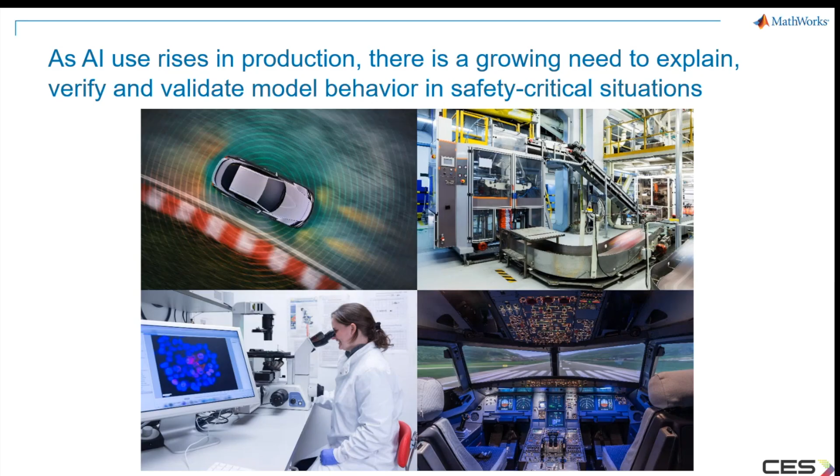Let's take a look at some of the key market trends in the aerospace industry, particularly around certified systems, software, and hardware. First, we will consider civil aerospace. In civil aerospace, we are seeing rapid innovation; new applications like urban air mobility and UAV certifications are becoming major areas of focus. And there is also strong momentum around sustainability, with technologies like green aviation gaining traction. More recently, the importance of cybersecurity and even AI certification has grown significantly as these systems become more intelligent and connected.

In the space sector, a lot of private companies are now voluntarily following standards like DO-178C to ensure high quality even when they are not formally required to do so. This shift reflects increasing pressure to meet the expectations of space agencies like NASA or ESA, the European Space Agency. New entrants are also aggressively pursuing certified projects, intensifying the competitive landscape.

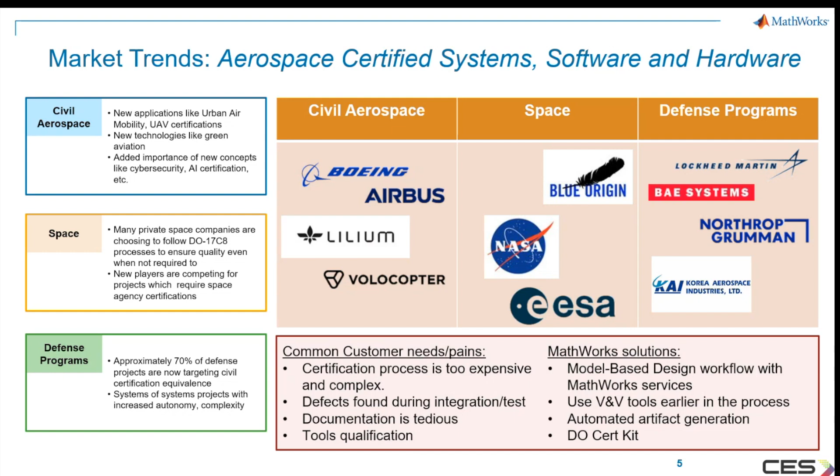Next is AI-driven system design with MATLAB and Simulink. Let's get into the specifics of AI-driven system design. It involves four main stages: data preparation, algorithms and modeling, simulation and test, and finally deployment into the field. It's important to note that this workflow is not linear. In many cases, it is iterative, especially when testing uncovers improvements that need to be made.

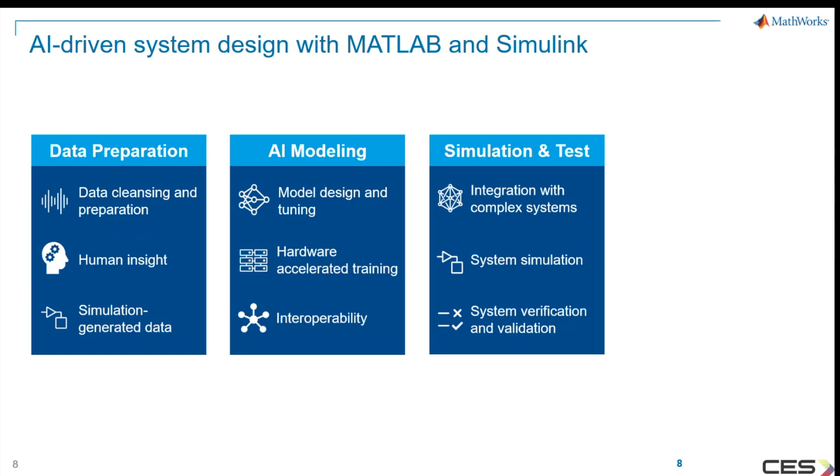Drilling down into each of these sections reveals mini workflows that need to be performed, and each of these has its own challenges. The first step in this workflow is data preparation. The data can come from multiple sensors or databases. Sometimes it is structured or unstructured. Sometimes it spans time, but with different time intervals. It can be noisy. It represents different domains and so forth.

One goal of data preparation is assessing these various sources of data. Not all data is critical, and some has more predictive value than others. And some events are extremely rare and may not be included in a given data set, but you still need to consider them for modeling. So engineers with domain expertise are best suited to determine the answers to these kinds of questions.

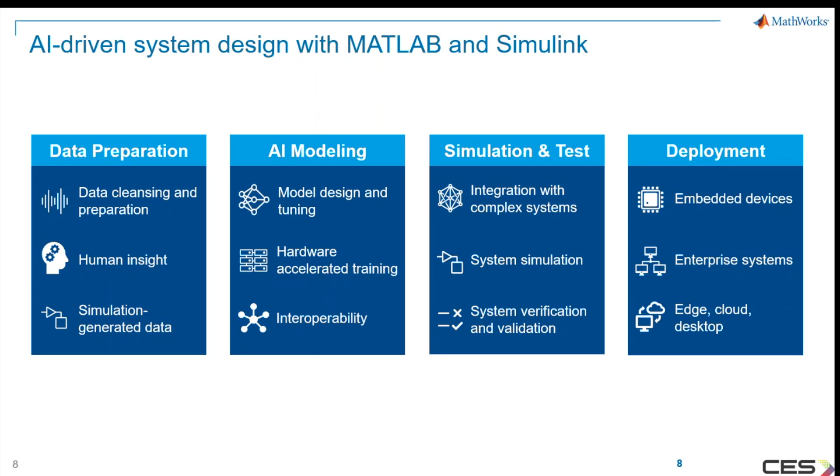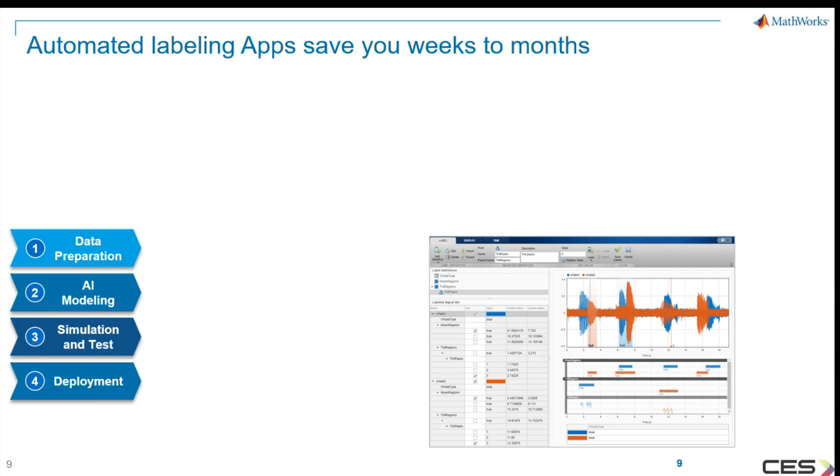And with our signal labeling app, a similar process can be applied to a wide range of signal data. In this example, we are labeling whale sounds. Both these apps also provide ways to automate the labeling process and save many hours of time. Next, we provide a facility for creating synthetic data. This can be vitally important when you are trying to build an AI algorithm that successfully handles extremely rare events.

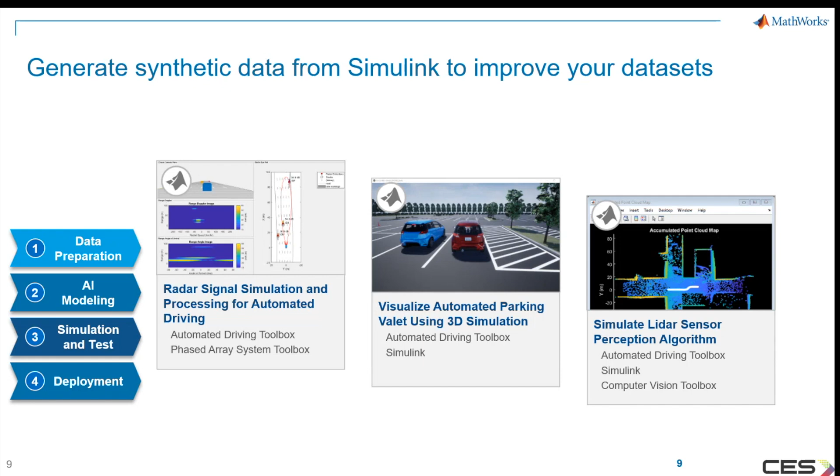Let's move on to the second step in the workflow, which may get the most attention: AI-based algorithms and models. Of course, it's important to have direct access to many algorithms used for classification and prediction, from regression to deep networks to clustering. And there are a variety of pre-built models developed by the broader community that you want to use, often as a starting point or for comparison purposes.

While the algorithms and pre-built models are a good start, it's not enough. Examples are the way engineers learn how to use algorithms and find the best approach for their specific problem, particularly reference examples. So at MathWorks, we provide reference examples built for specific engineering applications. We provide hundreds of examples for building AI models in a wide range of domains.

Is that the end? No. We also provide apps for modeling. For deep learning in particular, we ship pre-built apps that can help you automate the training step and provide visualization for understanding and editing deep neural networks.

And there is another app called Classification Learner. These kinds of apps and the Regression Learner automate those steps as well. And then comes the Experiment Manager app. It enables you to create deep learning experiments to train networks under various initial conditions and compare the results.

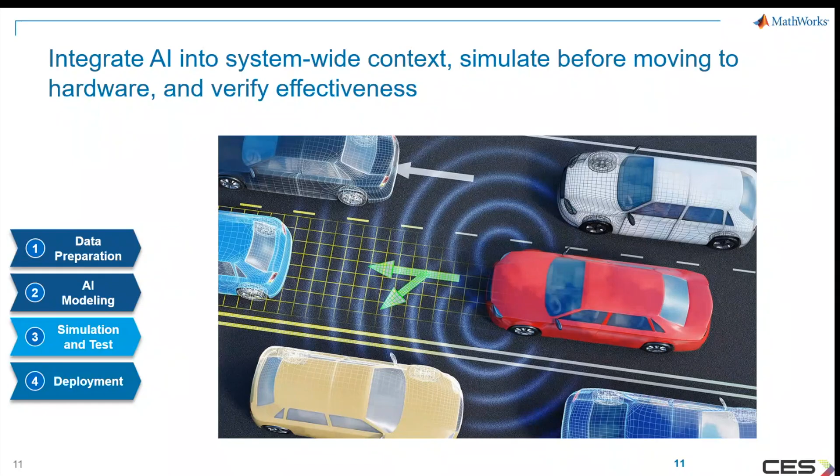And this is how it all works. Here is a small video. Engineers can combine the sensor fusion, control logic, vehicle dynamics, and visualization components with their AI models for simulating the scenarios in which they will operate. Here, this example shows how a vehicle and lane detector works in a self-driving car.

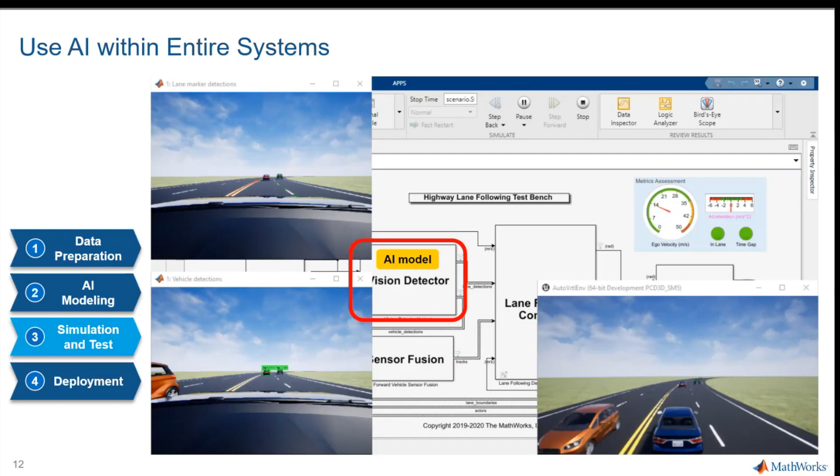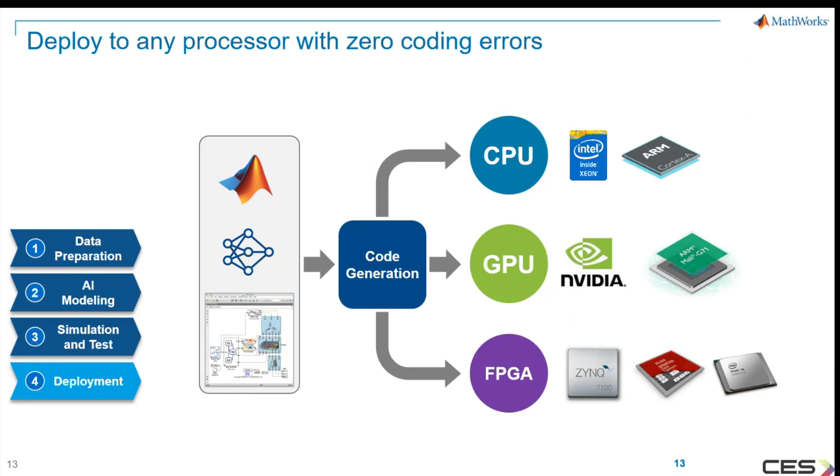Next is about the deployment. We have a unique code generation framework that allows models to be developed in MATLAB and Simulink, and you can deploy it anywhere without having to rewrite the original model. Automatic code generation eliminates coding errors and is an enormous value driver for any organization adopting this. The power and flexibility of our code generation and deployment framework is unmatched.

So deploying an AI model is not the end of our system design workflow. Organizations are also understanding that deploying models into systems is not an end state and they must be maintained continuously once they are in operation. In recent times, model DevOps or model ops is a process that organizations are adopting to manage the life cycle of models. In essence, model DevOps is a combination of software development, IT, and model development practices. Here is a familiar representation of model DevOps. Across all the stages, it's not one, but a combination of different software pieces running on the edge or in the cloud, coming together to build a complete solution.

So I have spoken about how MATLAB and Simulink are used in the design and deployment of AI models. But for model DevOps, MATLAB and Simulink integrate with all major platforms that are used across each of these stages. MATLAB plus Model DevOps enables cross-team collaboration to align the goals of engineering, computer science, data science, and IT for model lifecycle management.

And why MATLAB and Simulink for artificial intelligence? There are numerous benefits to building AI-driven products and services with MATLAB and Simulink. Your engineers can leverage their expertise without becoming programmers. Using domain-specific tools, they can design powerful algorithms that incorporate years of experience and can handle rare events. They can use modeling and simulation to tackle integration challenges and reduce risk. And the end result can be deployed and managed wherever it needs to be without recoding.

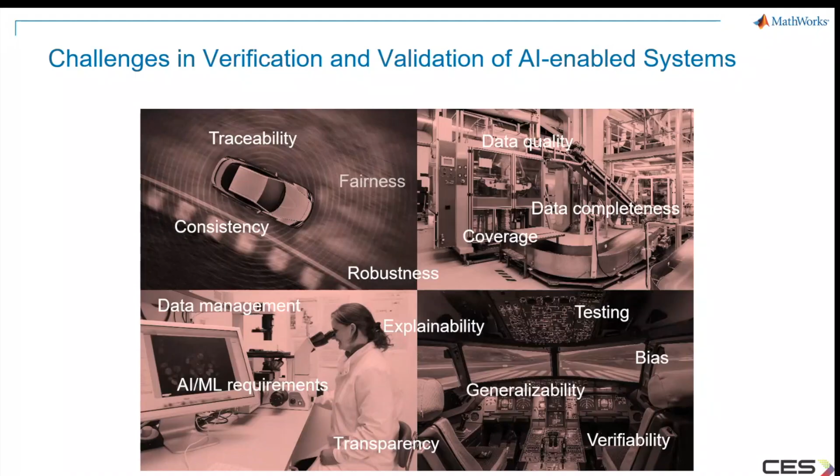Next is the challenges in verification and validation of AI-enabled systems. So here are some of the challenges. If I have to name a few, it includes data management, traceability, robustness, requirements, and much more. It's just a representative sample of some of the challenges that may arise from having AI components in our system. If we consider some examples, first, AI systems, especially deep learning models, can behave differently due to the randomness in training, floating point precision, and sensitivity to small input changes. This unpredictability makes it hard to verify the behavior under all conditions.

Another challenge is the lack of explainability, or the black box nature. Many AI models, for example neural networks, act like a black box. We don't fully understand how they make decisions. This makes it difficult to trace why a certain output was produced, which is critical for debugging, certification, and safety audits. Another challenge is data dependency. AI system performance depends heavily on the quality, diversity, and representativeness of the training data. Verifying that the data covers all relevant cases, especially the corner cases, is difficult. Bias or gaps in the data can lead to unsafe or unfair decisions.

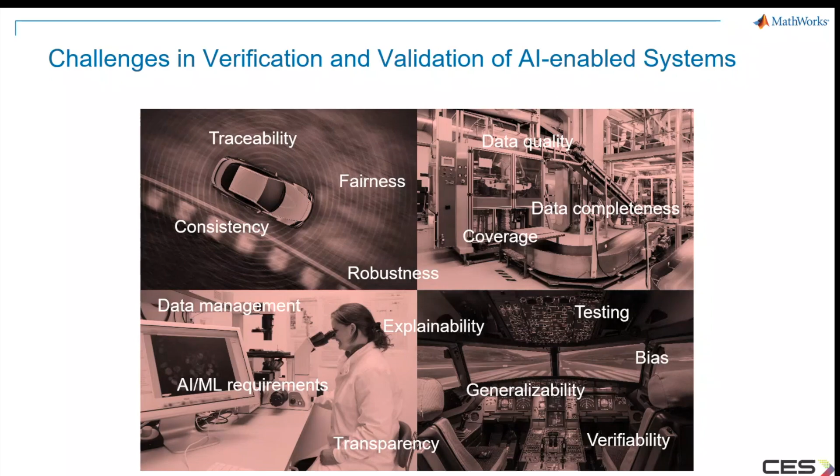Now let's see how we can address some of these challenges. The deep experience in safety critical certification enables us to drive new standards for AI. We know that some of you may be working in regulated industries that have these kinds of standards, and you may use our certification kits to ensure that the systems you make meet appropriate standards. These standards govern safety critical systems for airborne software, road vehicles, and sometimes the healthcare industry. The problem is that some of the verification methods they prescribe can't be performed or don't necessarily make sense for machine learning or AI related systems.

So this IEC certification kit, ISO 26262, it's mainly for the automotive, and DO-178C and DO-254 is applicable for aerospace related. And we are happy to inform that MathWorks is participating in the standards committees with EUROCAE and SAE to define new certification standards that are appropriate for artificial intelligence.

We know how important our current safety critical certification solutions are for our customers, and we are working to build new standards needed for artificial intelligence and then to provide you with the tools needed to certify your systems that include AI.

In healthcare industry also there is a similar standards preparation happening. FDA has released its first AI or ML based software as a medical device action plan, which outlines the regulatory framework for AI enabled medical devices.

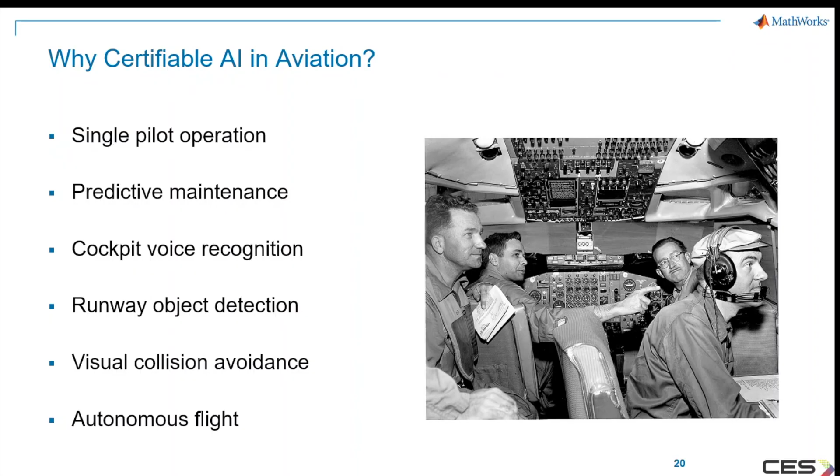The aircraft standard related to software design is given by DO-178C. Now, let's see what is DO-178C. It's a standard for software considerations in airborne systems and equipment certification. This software standard outlines the software engineering processes, activities, and tasks necessary to ensure that airborne software is reliable, safe, and it can perform its intended functions.

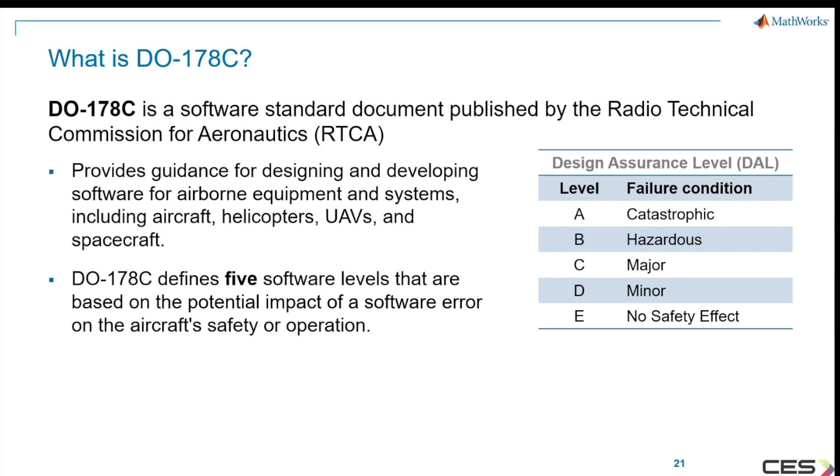It defines five software levels that are based on the potential impact of software error on the aircraft's safety or operation. These are referred to as design assurance levels, or DALs. So compliance to DO-178C is mandatory for software used in civil aviation applications in many countries. The latest version, DO-178C, was released in December 2011, and it includes updates to the previous revision, DO-178B, to reflect the advancements in the software technology and development process.

But it turns out that several DO-178C objectives cannot be directly applied to the software with the machine learning component, and this creates a problem. How are we then going to use machine learning in aviation software and certify it against DO-178C? How can we build trust in new verification methods for machine learning? The potential is huge, but the gaps and shortcomings need to be addressed.

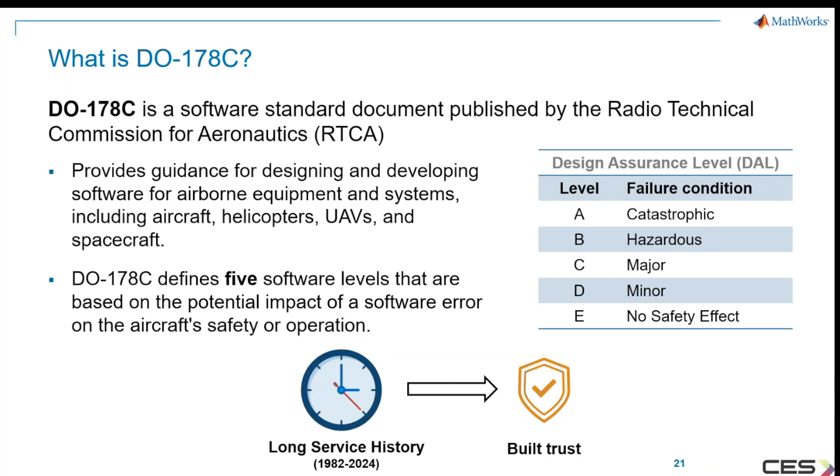For that matter, industry and regulators are working tirelessly and making significant progress for machine learning certification in aerospace. EASA, the European Union Aviation Safety Agency, has published two iterations of their AI roadmap and worked together with various companies to produce seminal work for design assurance of neural networks and the use of formal methods for learning assurance. FAA, although it hasn't published as much collateral, also stays at the forefront of these developments.

Another significant entity in AI certification for aerospace is the EUROCAE WG-114 / SAE G-34 Joint International Committee. It is expected to release the new process standard soon, which will set the standard for development and certification or approval of aeronautical safety related products implementing AI. And the standard is named ARP6983.

They have already published in April 2021 an aerospace information report, Artificial Intelligence in Aeronautical Systems. And MathWorks is playing an active role in this group also. Now let's see how big is the gap between machine learning and traditional software development.

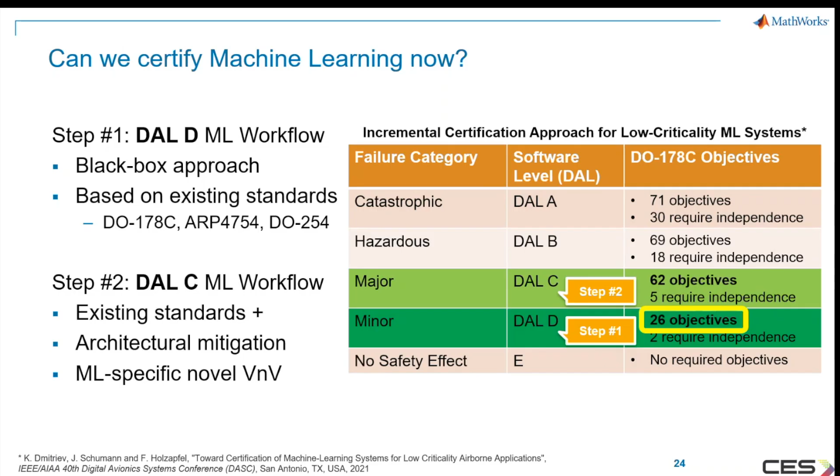For DAL-D, we can treat the software component as a black box. In that black box we might have the traditional non-machine learning source code, commercial off-the-shelf software object code, machine learning models, and machine learning source code all put together into an integrated object code. We don't need to know any of this from the outside. For DAL-D, we can just look at this as a black box.

We have our high level software requirements from which we have derived the software architecture, and within this software architecture some component is this black box. We will also develop tests from our high level requirements to test this black box. In summary, the origin of the source and object code does not matter, and so the black box verification according to DO-178C will satisfy all the objectives for DAL-D certification.

So the black box verification techniques are things like testing model accuracy, for example, something we are already used to as AI practitioners. This is just an excerpt of the compliance analysis that you have to do according to DO-178C. We can see here the objectives for DO-178C compliance analysis, and for DAL-D we can actually omit objectives 4 and 5. Those say low level requirements are developed, and derived low level requirements are defined and provided to the system processes, including the safety assessment. So these are not applicable for DAL-D.

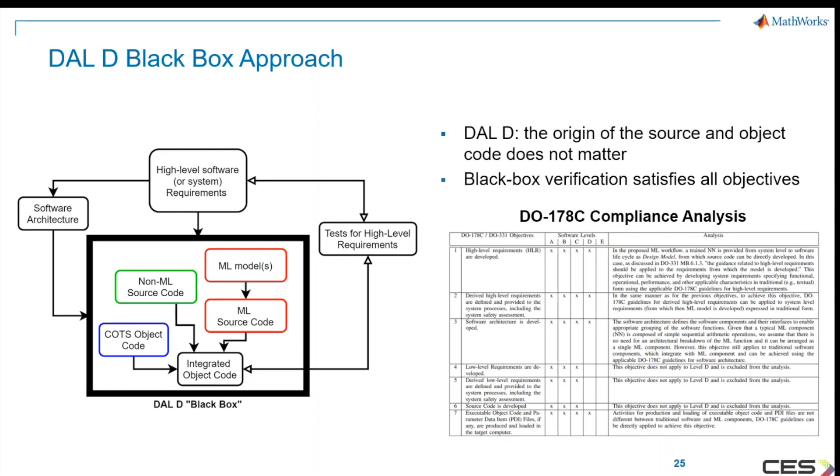And we will be following a workflow called the W-shaped development workflow for developing DAL-D components. The W-shaped development process is a framework by EASA to adapt the classical V-shaped cycle to AI applications, and I will be adopting this workflow throughout the presentation to explain how you can make your AI-enabled system suitable for DAL-D certification.

Note that this W-shaped development process is concurrent and it can coexist with the V-shaped cycle we typically see for non-machine learning components. So for example, from the system or subsystem requirements, we will derive or allocate requirements to the AI component and follow the W-shaped diagram. Or if it's a non-ML item, we can follow the traditional V cycle.

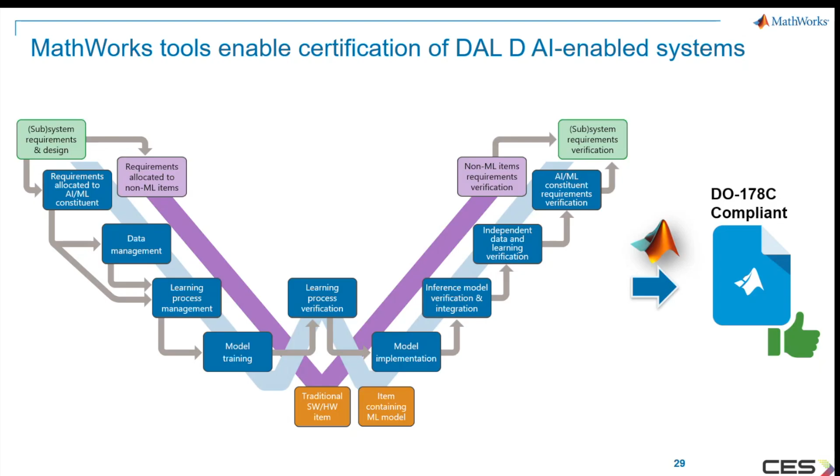Let's take a deeper look into the case study. So as mentioned, it's about a runway sign classifier. Before I explain further about this particular project, let's understand what a runway sign classifier is and what different variants are available. The runway sign classifier is a system intended for detection and classification of airport signs. The system receives visual images from a forward-facing camera installed on the aircraft, and it uses a deep neural network for detection and classification tasks.

There are different variants of such a system depending on the level of automation and corresponding criticality levels. The first variant is RSC FB. RSC stands for runway sign classifier, and FB represents flight bag. This variant serves as a pilot assistance system by providing information about the detected runway signs to pilots, for example, via an enhanced vision system. Failures of such a system will have minor safety effects, as the pilot is still responsible for the continuous perception of the visual environment and retains full control of the aircraft. Consequently, RSC FB can be assigned the lowest design assurance level, DAL D.

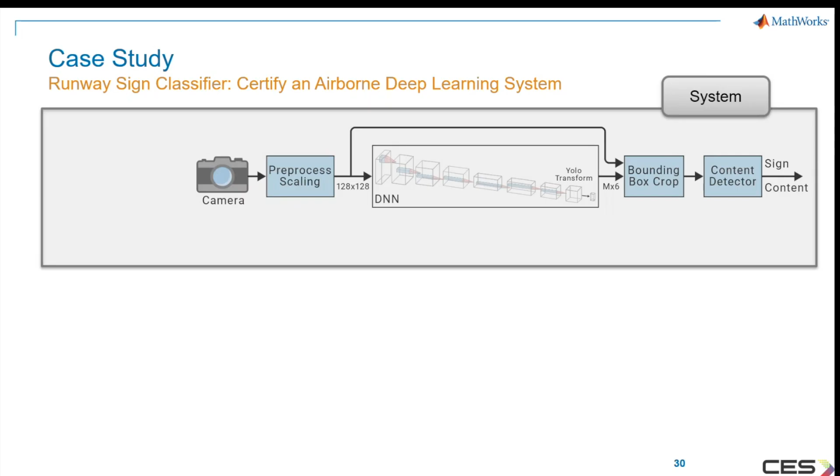As shown in the image, this system consists of a front-mounted camera on an aircraft. The camera relays images, we do some pre-processing and rescaling, and then we pass them to a deep neural network. In this example, we are using YOLO networks, whose role is to locate and classify airport signs on the runway. These signs will be either informational signs, which appear with a yellow background, or mandatory signs, which come with the red color. The bounding boxes and classification labels are identified and then passed to the pilot for information and the decision-making process. So the whole system is of low criticality, DAL D; it's just providing information to the pilot and not taking control of the aircraft in any way.

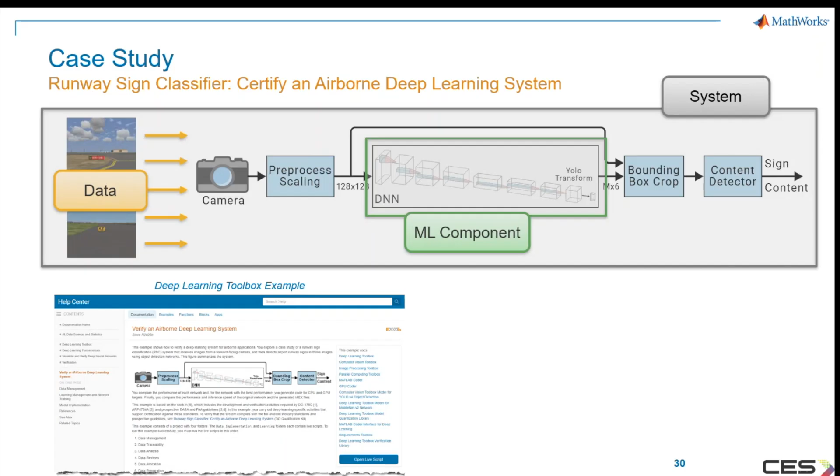Okay. Note that this case study is comprised of a few elements: the complete system, including everything from camera to the HUD, the ML component, which is a deep neural network, and the data.

For the data set, we will be using instances of different airport runways in various locations and operating conditions such as snow, weather, or daytime or nighttime, with the goal to adequately represent the operational design domain. The images for the data set have been created synthetically using Simulink Aerospace Blockset and FlightGear.

To support the discussion for this case study, we will make reference to the system, the component, and data in the following slides. As you can see on the slides, the example that I'm showing today is included as a part of Deep Learning Toolbox and DO Qualification Kit products from MathWorks. The Deep Learning Toolbox example is a lighter version of the end-to-end workflow example, whereas the DO Qualification Kit example addresses specific activities that support the certification against DO-178C. You can access these examples if you have the Deep Learning or the DO Qualification Kit toolboxes.

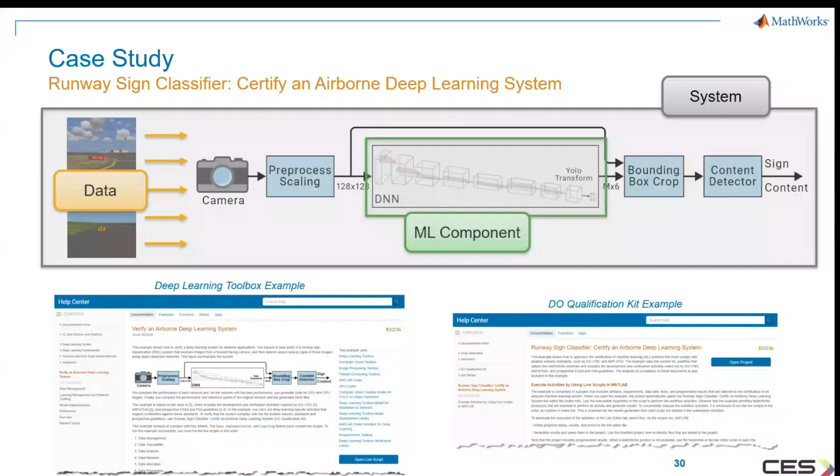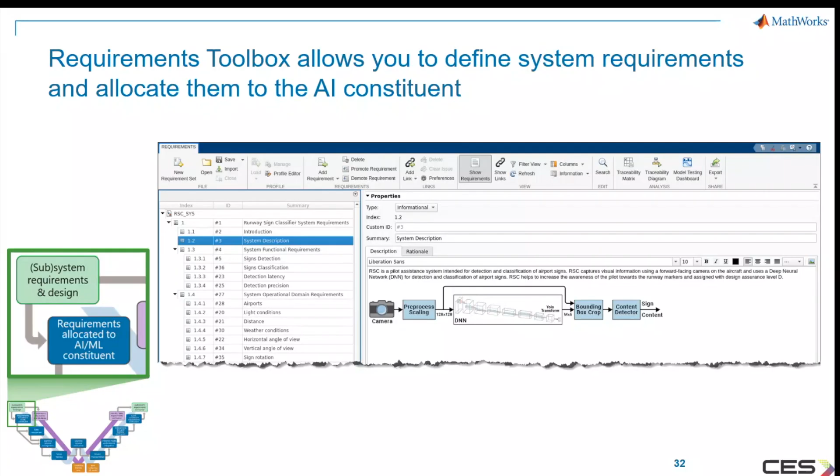So for the example I just introduced, I would like to take you through all the steps in this workflow, starting with the top left, the requirements allocated to the AI component. We have written a set of requirements in Requirements Toolbox for this problem. Requirements Toolbox allows you to define system requirements and then allocate them to the AI constituent. We can see here we have a system functional requirement and system operational requirement. These are the system requirements that are derived in the system process ARP 4754A, and we will need to allocate these to the component or to the system.

So we have functional requirements: what does my system have to do? And we also have the operational requirements: in which context my system has to perform. So here we have written a set of system requirements that we anticipate you would require for such a system. You can see the details here.

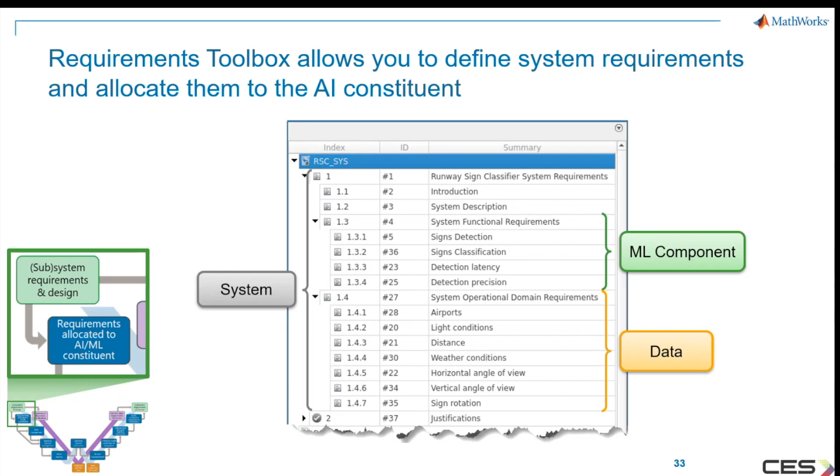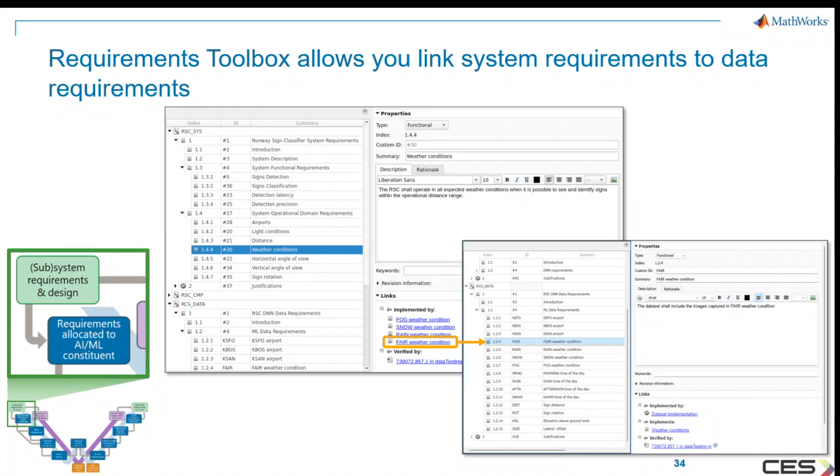Then by using the Requirements Editor, we take our system requirements, for example, the weather condition requirement, and we can link this directly to our data requirements. So here we have our four weather conditions: fog, snow, rain, fair, and we can link these requirements to four separate requirements on the data.

In order to really tie these requirements to the data images themselves, we have created a data trace table. This table is automatically generated from a MATLAB script. It puts together all the data requirement IDs with the corresponding synthetically generated data. When generating the synthetic data, there is metadata upon construction with the requirements that are met for each of the generated images. So for example, let's say I create an image in San Francisco airport with fair weather condition, and those data requirement IDs will be

tagged in this metadata. Then for each requirement ID, we search through the corpus of images we have generated, put in all those images that have the corresponding data requirement ID, and then create a reference to those images through the MATLAB image datastore object. So taking a fair weather condition example, we have 114 images corresponding to fair weather condition, and they are all held by reference in this image datastore.

This shows how we can link system requirements to data requirements all the way down to the data itself. To go to the data level, we can simply click on the Open Data Store hyperlink, and it opens the Image Labeler app. So this is the means by which we can now review the correctness of the data. We want here to check that the images we have generated are correct, or in more general terms, that the images associated with the specific data requirement ID are the right ones.

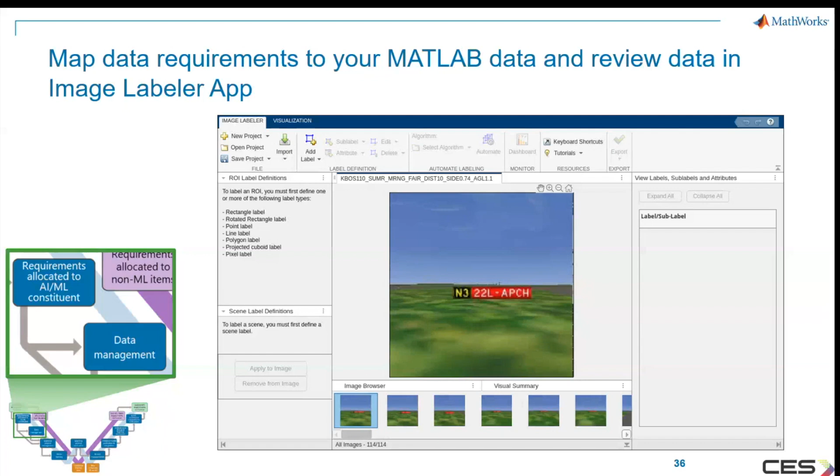Coming back to the use of the Image Labeler app, you can use it to correct issues with the bounding boxes or the labels, such as resizing or moving the bounding boxes, deleting the boxes, or changing the labels. When doing the synthetic data generation process, we got an incorrect bounding box position, which we can correct manually by simply dragging the bounding box as we review the data set.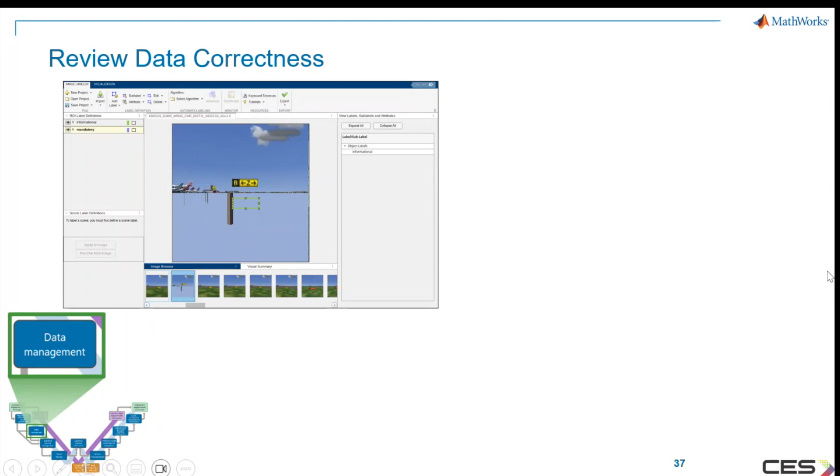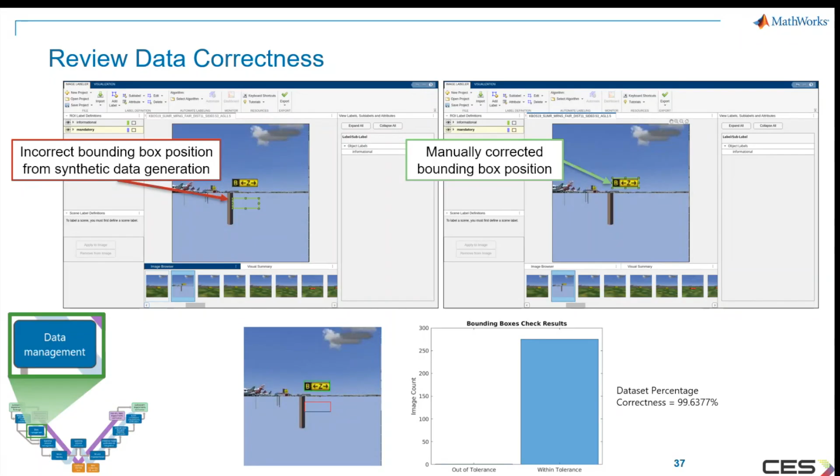And then we can also compare the reviewed data with the original data set and see how many boxes we have moved. We define the tolerance as a 5 pixel shift of the box.

And then comes the data augmentation. So this will improve the network accuracy by randomly transforming the original training data during the training. So here we have applied a color jitter augmentation in HSV space and random scaling by 50%.

Next up in the W-shaped diagram is manage, train, and verify the learning process. Moving on to the next step, here we want to build our network architecture, train it, and verify it. MathWorks has tools to interactively design your network, allowing you to be more productive. You can also interactively track the training and performance for different experiments, allowing you to select the network that best suits your metrics. And of course, you can accelerate the model training leveraging the GPUs and the cloud.

So at this point, we need to come up with an architecture to start from and analyze how different variations of the network may perform. Based on the requirement for the ML component, we decided to use the YOLO family for this example. These models require us to estimate anchor boxes as a part of the hyperparameters.

So what are anchor boxes? Anchor boxes are a set of predefined bounding boxes of a certain height and width, and these boxes are defined to capture the scale and aspect ratio of specific object classes you want to detect and are typically chosen based on the object sizes in your training datasets. Once we have estimated the anchor boxes, we train various YOLO networks with some standard hyperparameters.

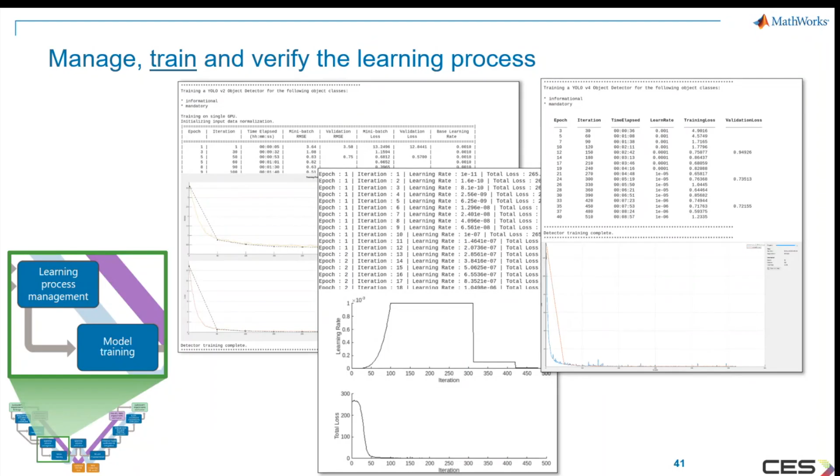And here is the learning process verification stage. And for the verification, given this is a DAL D component, we only require an overall accuracy on these models. So we define this as a part of the system requirements and then derived the ML component requirements that the model should have an average precision per class of at least 95%.

And as I have mentioned earlier, we have a unique code generation framework that allows the model to be developed in MATLAB and Simulink to be deployed anywhere without having to rewrite the original model. Automatic code generation eliminates coding errors and it's an enormous value driver for any organization adopting it.

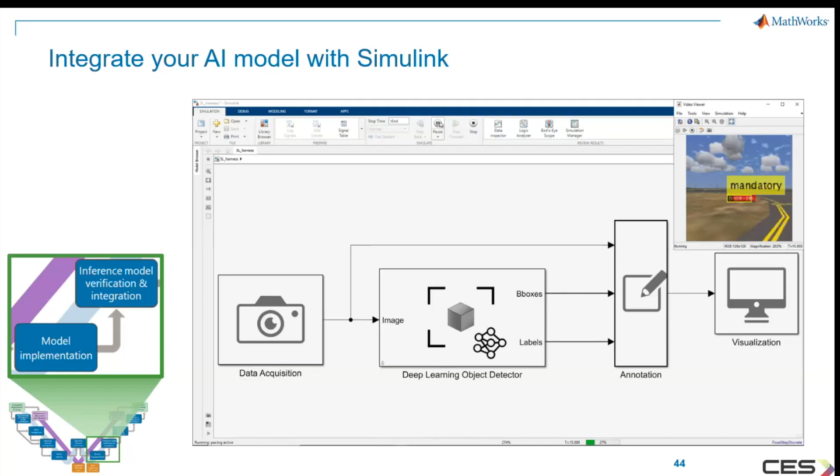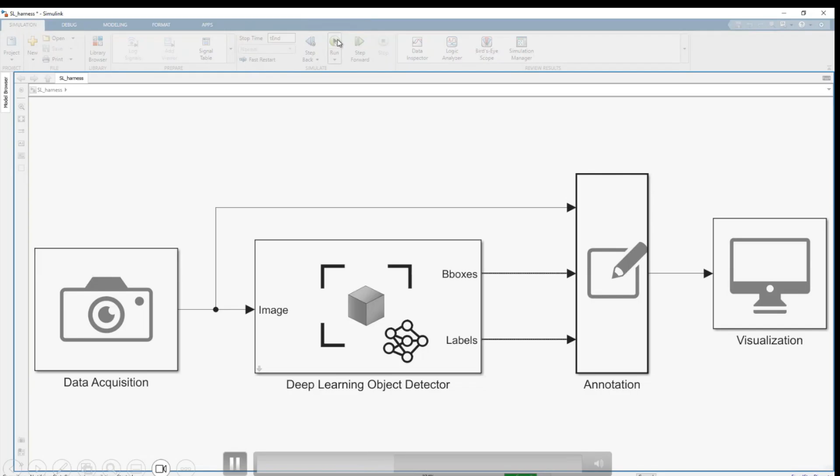And finally, here comes the integration of your AI model with Simulink. So basically in the center, you can see the deep learning object detector that we trained, and now we have a few different blocks. We have the data acquisition block and a visualization block that takes the role of the heads-up display. And then we are just passing a bunch of images through, running inference or simulating what the output of the network should be.

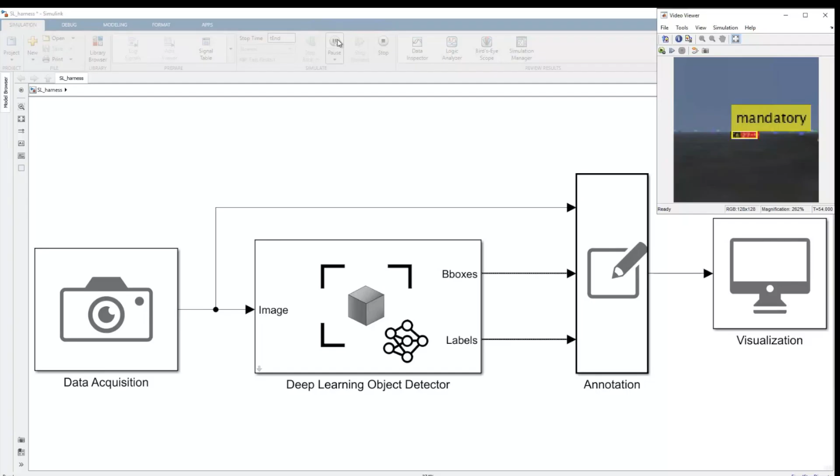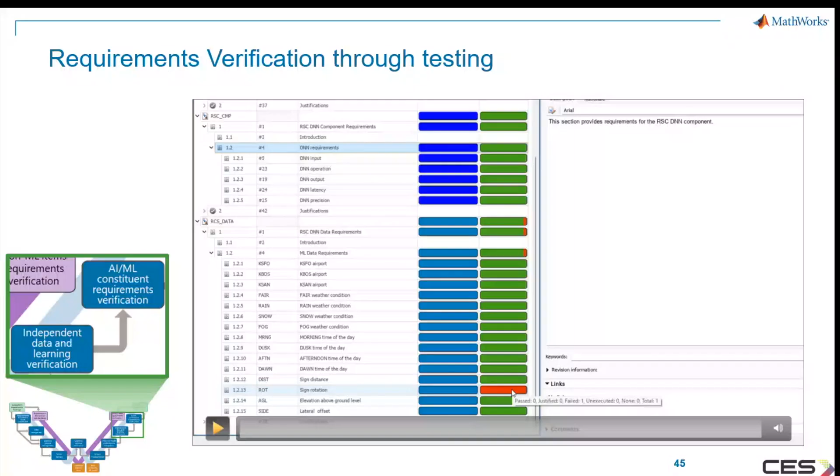Next, as we move to the final stages of the W diagram, I want to go through the process of requirements verification through testing. So recall, we had all our requirements and you can see it here. Now, for each of these requirements, we have written unit tests and now we want to run those unit tests. So we can just right click and run this test. And now by running the test, I can see if these requirements are met or if they are unfulfilled.

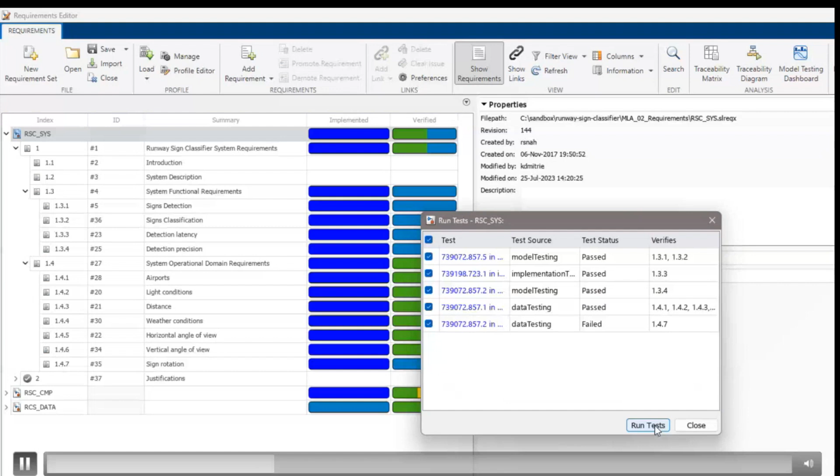After doing this, both at the system level and at the component level, I can see that there is an unmet requirement. And if you recall a few slides back, we didn't have any rotation sign images. So this unfulfilled requirement is representing that failed test.

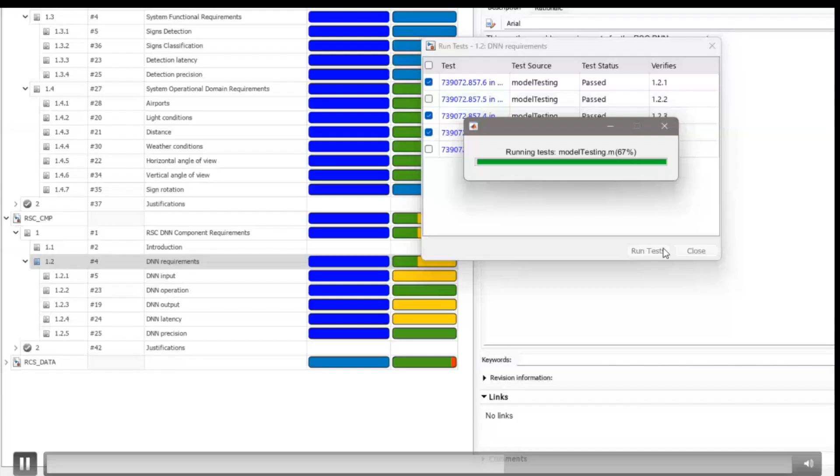But now, for a DAL C system, it's not enough to simply treat the object detector as a black box. We need to gain a better understanding of what is going on inside the object detector, and this includes placing requirements on the machine learning model itself and gaining understanding of the emerging properties of the neural network. So standards will not be ready until 2025, but we can hypothesize some techniques that may become relevant to verify and run machine learning models. We'll see how we can do it.

So can we tackle DAL C today? We are still waiting for the standards to be released. But what can we do today? It turns out that we can also address DAL C today, and I will quickly explain how. This is possible through the use of an architectural mitigation strategy, through the use of dissimilar DAL D

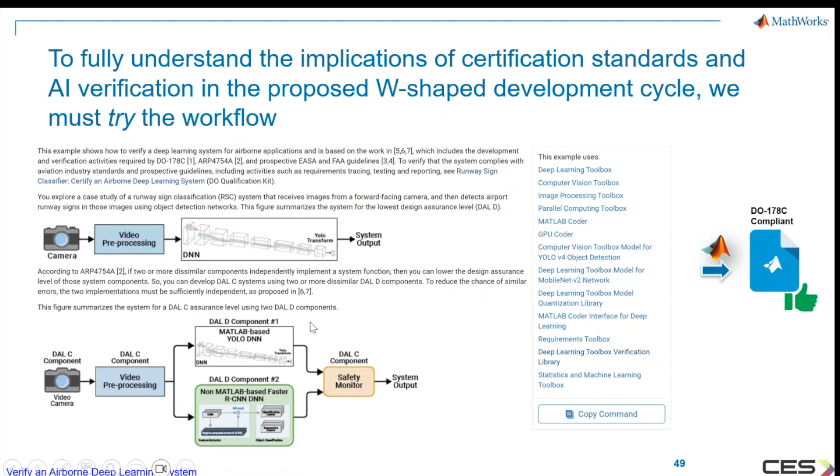So here is the demo. Here is an example. Of course, moving to DAL C requires going back to the requirements and making modifications to some of the requirements, adding new ones, and so on. Earlier, for the DAL D case study, we included Deep Learning Toolbox and DO Qualification Kit as part of the reference workflow example.

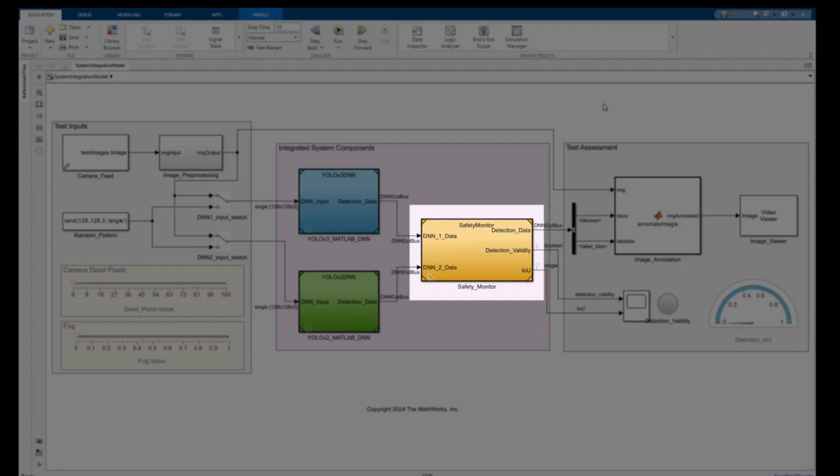In this case, the test harness. Let me just run the video. So in this case, the test harness simulates through the sample of test images, performing some pre-processing, and it can be a DAL C component. And then it predicts the bounding boxes from both MATLAB YOLO v3 and YOLO v2 detectors.

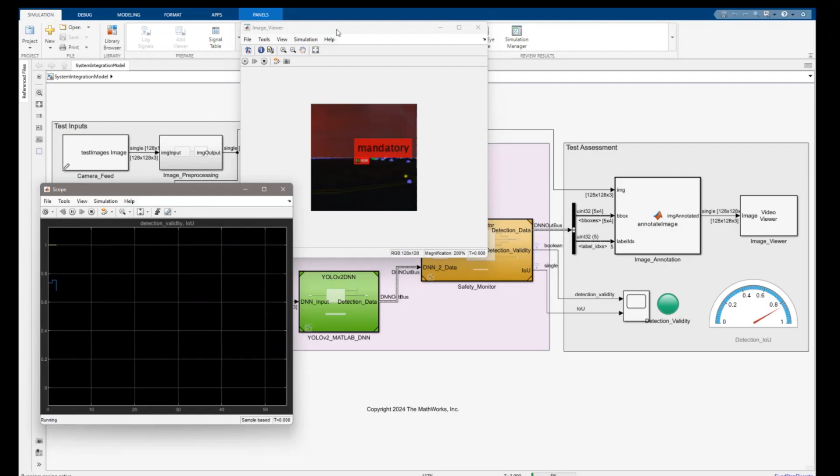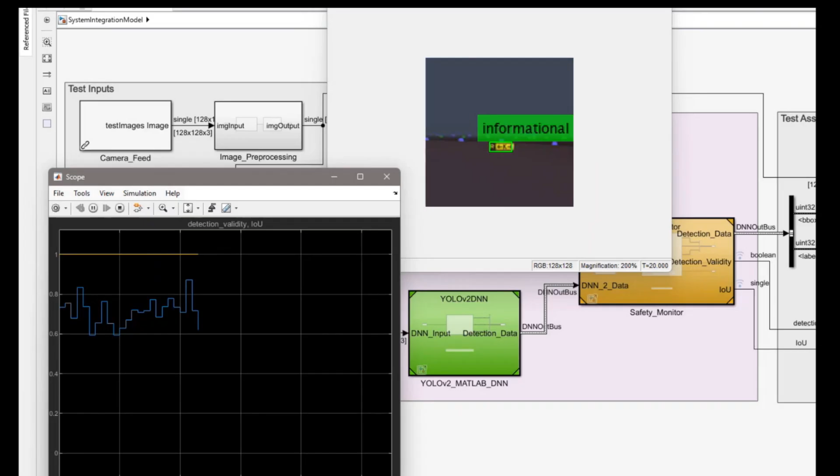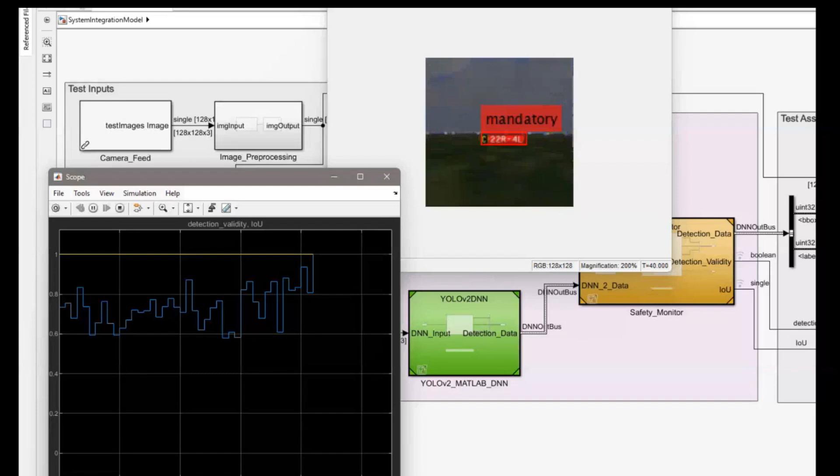Then the bounding box information is passed to the safety monitor component, which is DAL C, for validation. The safety monitor works so that if the intersection over union, or IoU, of the best detections of the two object detectors is above the threshold, then the safety monitor accepts the detection with the highest score.

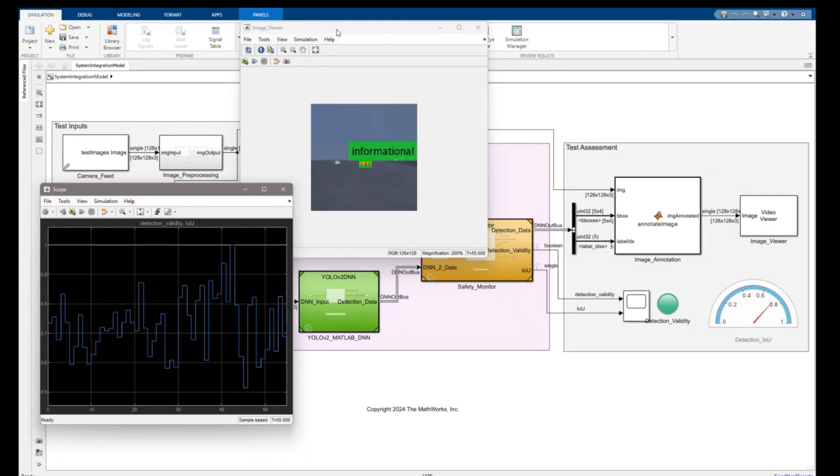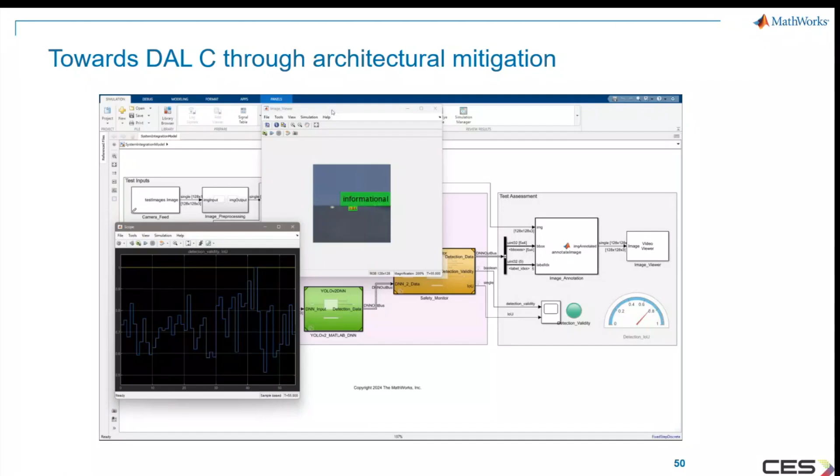The detection box and the class label are overlaid on the image and shown in the image viewer window. As we can see from the result, in this case, both DAL D components seem to have agreed on all examples, and IoU is above the threshold for all image instances.

So what are the key takeaways for AI certification in airborne systems? There is a need to incorporate AI in safety-critical applications, and AI standards are still in progress. However, we have shown through a reference workflow, a case study, how this can be done today for low criticality applications.

Some methods are already established and others are in progress, and we will need to wait to see how they get adopted and to what extent they become part of future standards. Nevertheless, we have seen how to address DAL C today through architectural mitigation strategies. I strongly encourage you to look into these end-to-end reference workflow examples in Deep Learning Toolbox and DO Qualification Kit, which can be used as a template for other projects beyond aerospace.